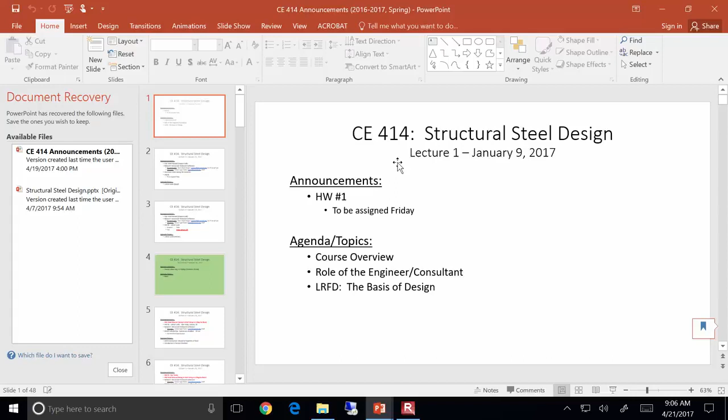All right, let's get started. We are near the end here. All right, two more lectures, including this one. We have this lecture, we have Monday, and then we have Wednesday off, Friday's exam review day.

What's that? I told you all that. I said that if you looked at the syllabus, I had that as a makeup day, and since we haven't had any snow days, I was going to hold myself to that. Well, there is that. I know, so if there's a blizzard...

All right, let's see, 1, 2, 3, 4, 5, 6, 7. I wouldn't be surprised with the weather we've had. I've gotten used to it being warm. Now I'm going to walk outside.

Okay, so let's be clear on the agenda. You all are turning in homework 8. I have given you homework 9. It is due next Friday. So we have one more homework here and one more in concrete, both due Friday. That's why I was saying don't put the concrete homework off to the last minute because of this one. Well, I mean, we got other homework to do next week.

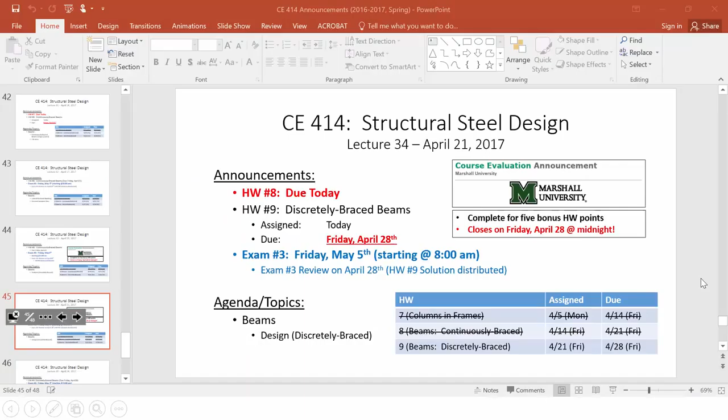In the meantime, I want to get into our final topic of the semester, which is designing discretely braced beams, okay? Now, just a heads up, I did re-record the lecture from last time. It was a mess. We didn't have the examples worked out, so I went and re-recorded it. What's that? Well, thank you.

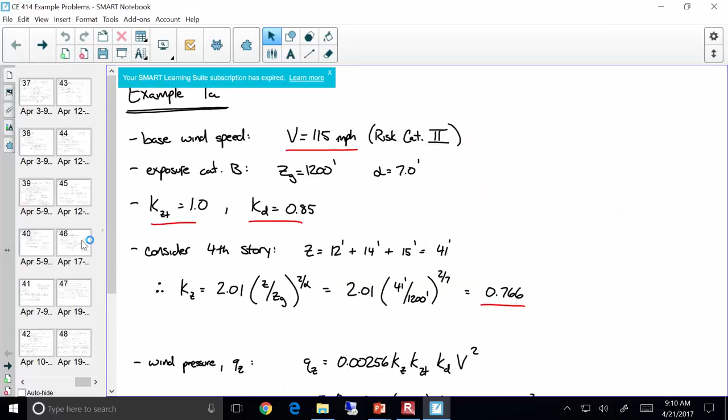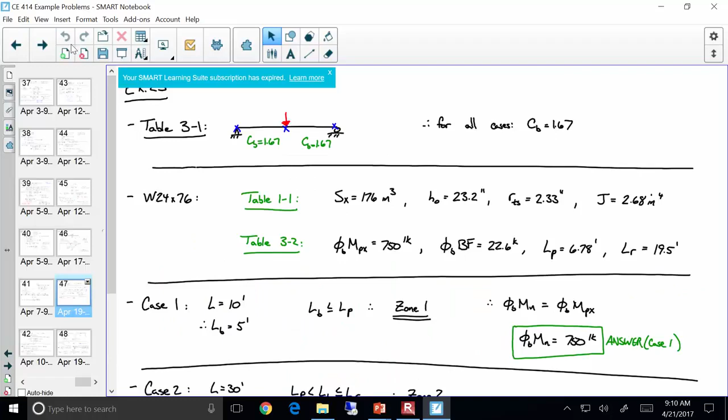Okay, one thing I'll point out, so on this example, I wrote out the answers, the 1.67, the 2.05, and the 2.33. I also went and did example 23. As you can see, I've got that done in the notebook. The main reason for doing that is that during exam review, if you all have questions about it, I can pull it up. So that way we have that.

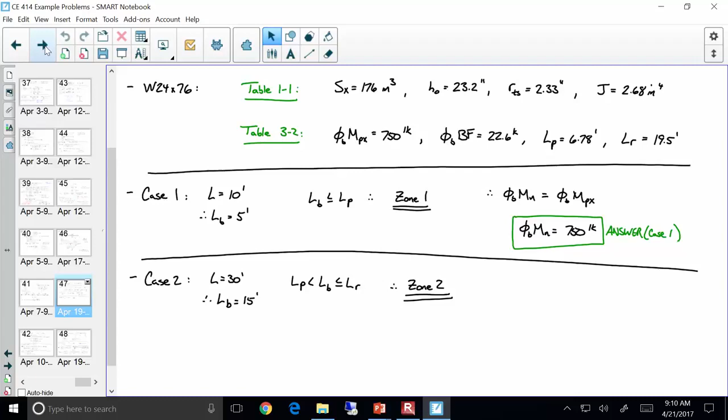But before we get into discretely braced beam design, I really want to make sure that discretely braced beam analysis made sense. Did anybody have any questions on discretely braced analysis? Yes? Okay, that's a good question. And that's really important for our discussion today.

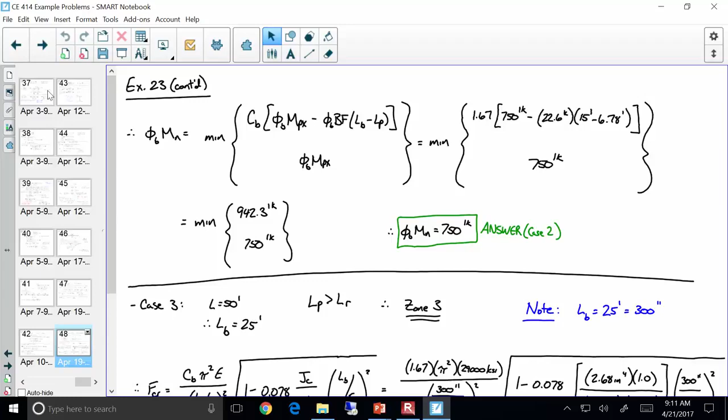The zones depend upon where your unbraced length is. So your zones are divvied up based on the two anchor points, L sub P and L sub R. So for case 1, in that example we did, we had an L sub B of 5 feet, right? That was less than LP, right? So that put us in zone 1, okay? And for case 2, we were between LP and LR, so that put us in zone 2. With me so far? All right, anything else?

That's the difference, yes, that's the difference. Any other questions? This is good stuff.

In order to design a discretely braced beam, you need to understand the LTB curve, the idea that there's 3 regions split between LP and LR. You have zone 1 that's fully plastic, zone 2 that's inelastic buckling, and zone 3 that's elastic buckling. You also need to understand that CB can serve to amplify your capacity. However, I don't care what CB does to your capacity, you're cut off at MP.

Now here's the problem with beam design. When we did columns, remember our column curve went down like that? We had an inelastic curve and an elastic curve. Barring material properties, to draw the column curve you only needed one property, and that was slenderness. I gave you a steel and said just plot the curve, and that was it. That column curve was the same curve for every single column, the W10 by 49 and the W14 by 800, and everywhere in between. The problem with beams is that's not the case.

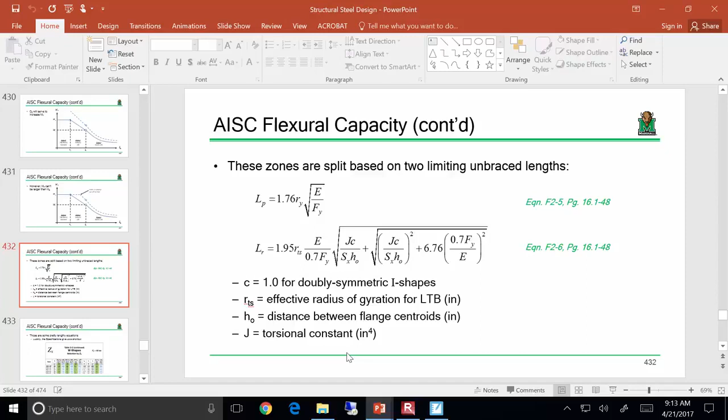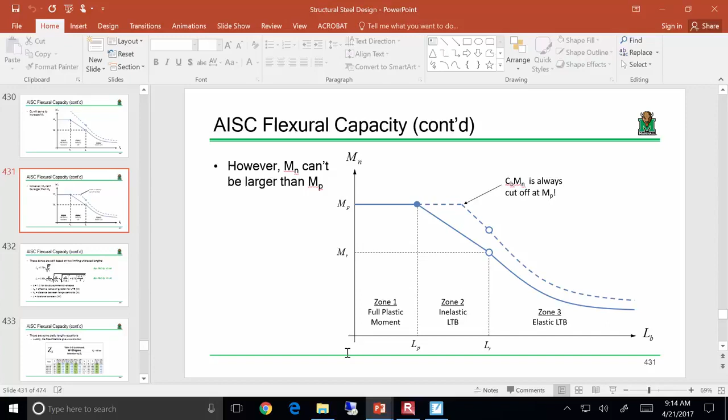Unfortunately for beams, there is not one single LTB curve that works for all of them. If I wanted to plot the LTB curve for one beam and then look at another beam, I'd have to plot an entirely different curve. Each curve is unique. They're all shaped the same, but all the individual values are different. Let's just take LP and LR - every single shape has a different LP and a different LR. That right off the bat dictates that every curve looks different.

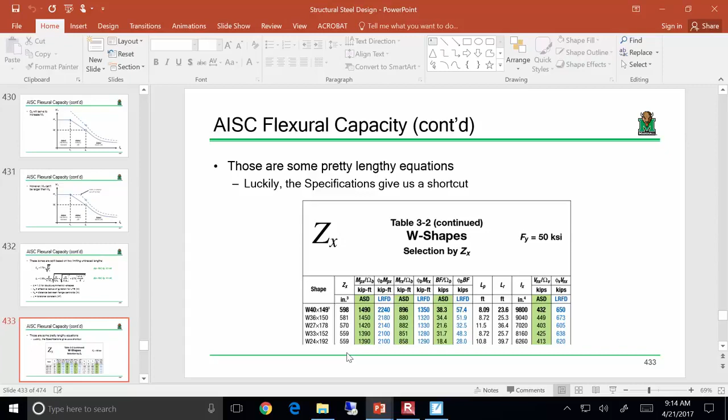Does that make sense? Does anybody have any questions about that - that every curve is going to be different, unlike with columns where it was the same curve for every column? Everybody okay with that? All right, let me put this in full screen.

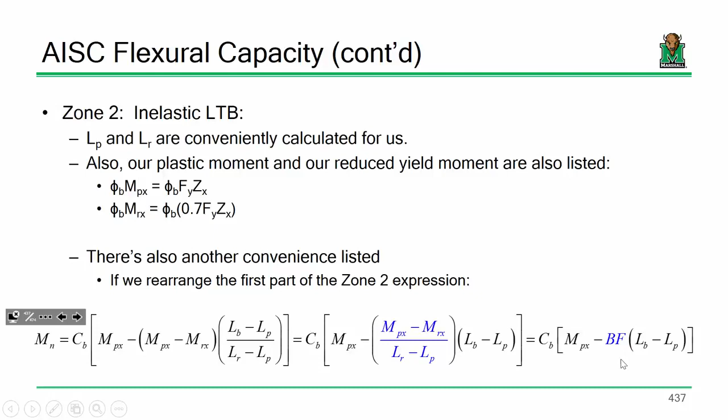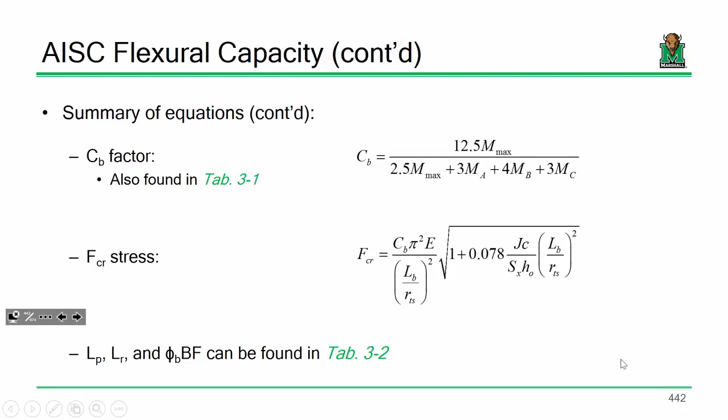If you understand that, then I'm about to show you a little bit of a mess and then simplify it a whole lot. We ended last time essentially summarizing our LTB expressions, zone 1, zone 2, and zone 3. These expressions are essentially plotting the curve, and we did an analysis example. To design a beam is difficult because each curve is unique.

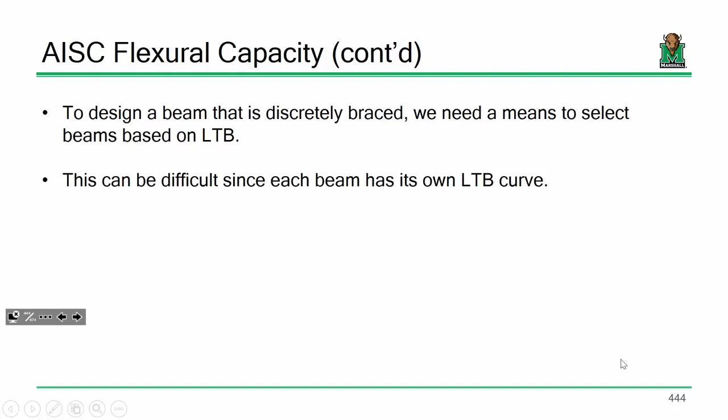So what the spec gives us is this. Now this is a tab-worthy guide - if you have your tabs with you, you definitely want to do this. I want everybody to turn to page 3-99, and there's probably 20 or 30 pages of this guide. Now, I know when you start turning through these pages, it starts to look like a mess.

You'll probably start to get to curves that look like this, and you'll just go, you have got to be kidding me. Really? Now, this looks like a mess, but really, all that is every single LTB curve for every single section, all plotted on top of one another. That's what that is.

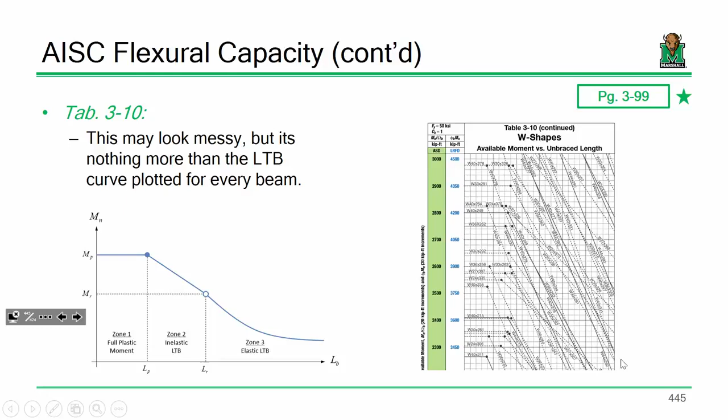There's no other way to select a section - that's the thing. Because each LTB curve is unique, there's no other way to go about it. However, the folks who wrote the manual were a little bit clever about some things.

Let me show you something. Have you noticed, thumbing through those shapes, that some of the lines are dashed and some aren't? What do you think those solid lines represent? No, it's not different zones. Just like the bold ones in the ZX tables - remember how in the ZX tables they were grouped, but the top row was bolded? Why was that top row bolded? It was the lightest within a given group, right? If you look, what you'll see is those solid lines are the lightest within a given chunk.

So for instance, I'm looking at this page and you can see there's a lot of stuff going on here, but I'll show you how this works. Now, I want everybody to look at the top left corner of the pages. What's FY?

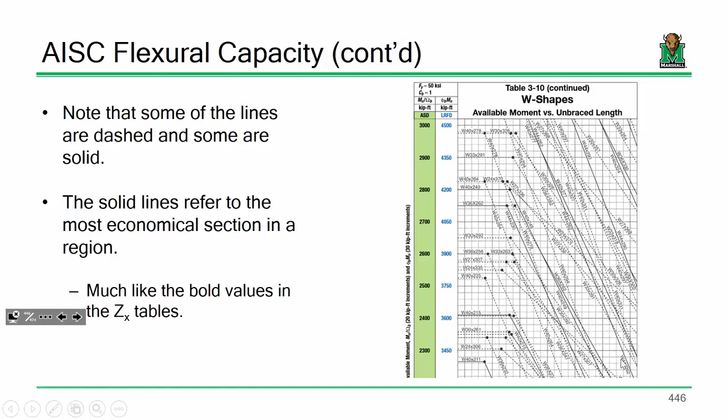50 KSI. So obviously, if you have a different grade of steel, you'd have to use a different guide. Well, what's C sub B? Every single one of these figures, every single one of these plots were plotted contingent upon the fact that C sub B equals 1. So here's what you do.

When we're in design mode, we're rarely dealing with the beam where C sub B equals 1. Usually C sub B does not equal 1. It's usually larger. So what we do is we enter the table. On the x-axis, we find our L sub B, our unbraced length. And on the y-axis, we find our moment. But our moment is not the factored moment, it's the factored moment divided by C sub B. We divide that C sub B out so that we're sort of dealing with a moment where C sub B equals 1. And the way that works is this.

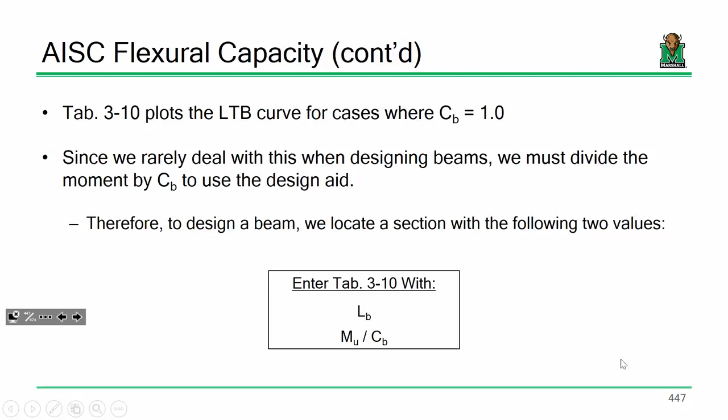Okay, so we enter that chart with those two values. Let's say we've got an MU over CB of something like 272.5, and we have an unbraced length of 20 feet. So this is what I did. I say, all right, let's find 20 foot on the x-axis. Let's find that value on the y-axis. Notice we're using the blue axis, not the green one, right? So find that, and that point's about right here. Everybody okay with that?

Now I propose that everything up here in this upper right region would be a safe section, okay? Because everything in the upper right, I mean, what is that indicating? Anything in the upper right would be a section that has a larger moment capacity and a larger unbraced length. Those are all conservative scenarios. So anything in that upper right portion is fine.

Which section do I pick? Do I pick the W21 by 68? I say no. I say you pick the W14 by 61 because that's the solid line. That is the lightest section within that given group, okay? Now, just so you know, the solid lines in this chart and the bold lines in the ZX tables may not necessarily match. But again, we're talking about different scenarios. We're talking about buckling as opposed to yielding, so it's a different scenario. Make sense? Everybody okay with that?

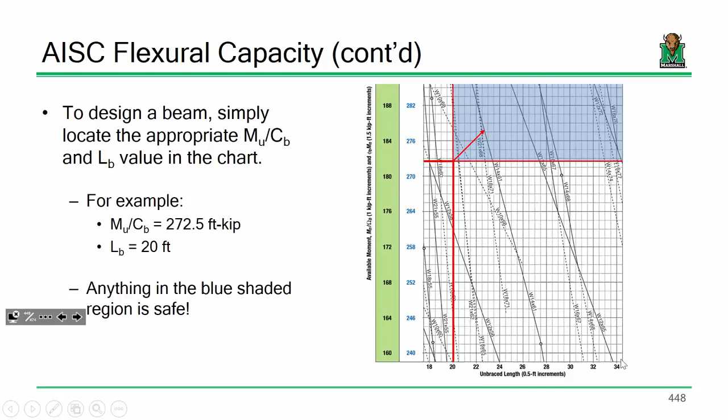Okay. Now, once we select a section, we have to go back and check it. There is no, I don't feel like, no, you have to check it. And here's the reason why. C sub B can serve to falsely give you a beam design. In other words, how can I put this? You know, what does C sub B do? It amplifies your capacity, right? It makes it larger. But it cannot be larger than M sub P.

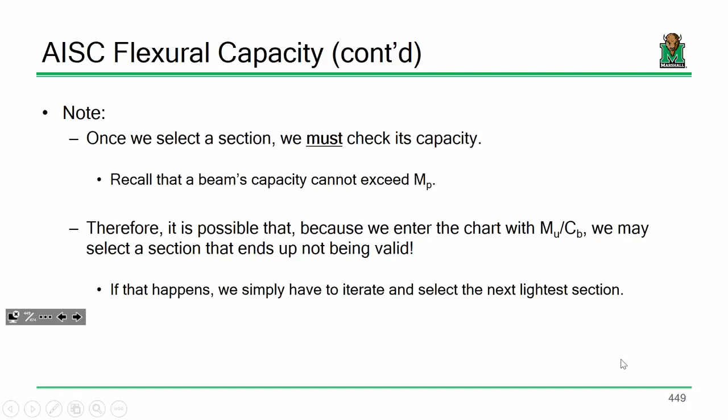Because of that, it's very possible in design that you can get, I guess the best way to call it, like almost a false positive, that you can select a section, it looks like it's good, but then when you go back and do the math, you find no, it's invalid, okay? And that'll make sense when we start getting into and digging into an example, okay? Everybody with me so far?

Okay, all right. Then let's take a look at this example. This example is a little involved, but we're going to do the example 4 times, okay? Because I want you to really understand beam design. And the only way I think that you can really understand it is to go through different scenarios.

So let's really try to digest what's going on here. Okay, so I want to select the lightest section. It's going to support a uniformly distributed service dead load of 600 pounds per foot. Now that includes the beam self-weight, so we're never going to have to go back and update dead loads with this problem. You would, if that statement wasn't there, with every beam that we pick, we'd have to go back and check to ensure that our estimate is fine. But for the purposes of this problem, we'll just say that 600 pounds per foot includes the self-weight.

Now this beam also has a concentrated live load of 40 kips at midspan, okay? So unfortunately with this problem, we have a substantial dead load and a substantial live load, so we're going to have to go through and compute C sub B. So this will give us a little practice on that.

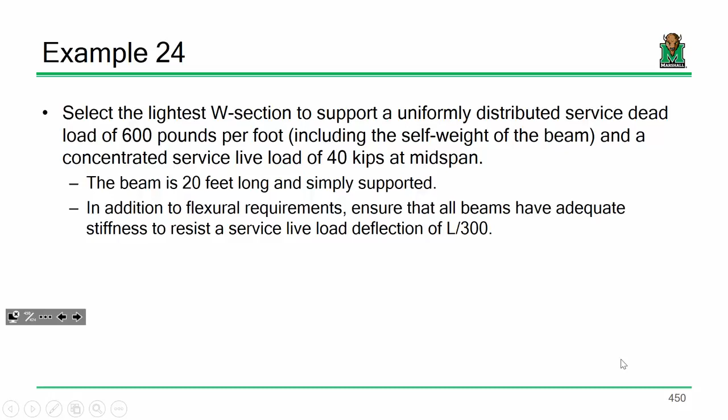Everybody okay with this? Now, the beam is 20 foot long. What is its unbrace length? Well, I didn't say that, okay? Let's look at the next slide.

We're going to design this example 4 times, looking at 4 different cases. Let's look at case 1. Case 1, we're going to take C sub B equals 1, and we're going to take LB equals 20. That is the worst case scenario. Does that make sense? Longest unbraced length, and we're not accounting for moment gradient.

From case 1 to case 2, we're going to say, let's actually go through and compute that C sub B value, and let's see how that affects the design. And you will see that it does affect the design.

Case 3, we're going to put a brace at midspan, right there at that point load. So that means L sub B is 10. We're still going to take C sub B equals 1 on case 3, and then case 4, we're going to go through and compute it. Everybody okay with this?

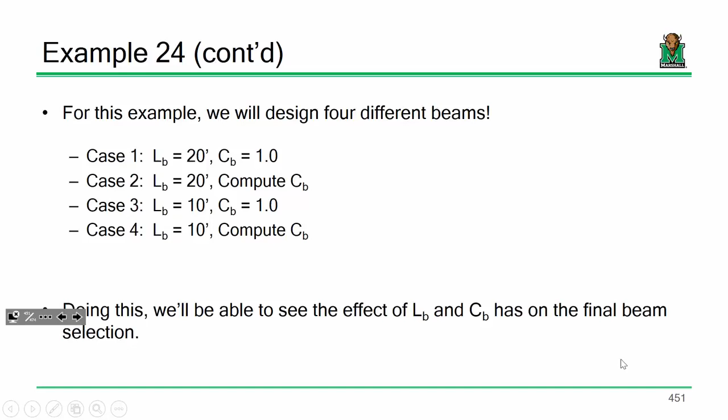The idea is I want you all to have a lot of practice with this table, and I want you to understand how L sub B and C sub B affects your design. Effectively, I would say this is about our last example for the semester. I'll show you all shear at the end, but it's not a big deal.

Excuse me. Save the best for last. Okay.

Okay, example 24. Let's look at the beam real quick, beam parameters. What's going on?

Okay, what was our dead load? Now, what would this be? 1.2 times that, so what is that? It's 6 and then 12, so 0.72. 12 times 6, 72. Did I do that right?

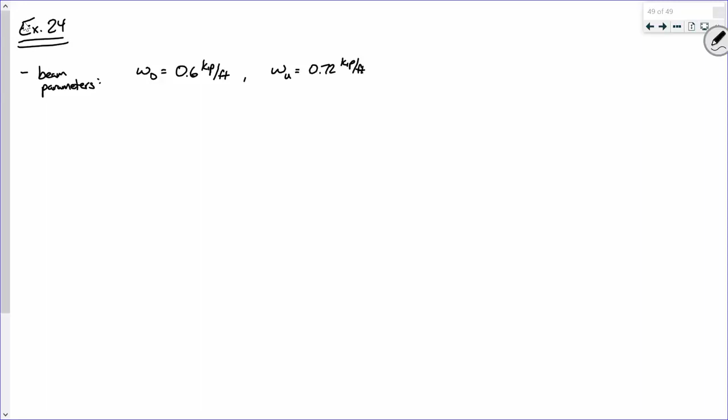All right, now we've got a live load of 40 kips. So what is our factored live load? There we go. 64.

On the homework or on the exams, this becomes a trend. If I see you all trying to take that point load and turn it into a distributed load, don't do that. You can't do that because you're going to get a different moment and a different deflection.

Everybody okay with this? We really need to make sure we're clear on that. Now, before we...

Go into moment requirements, I want to take a little bit and discuss serviceability requirements. I guess I should also put the span length is 20 foot, which is 240 inches.

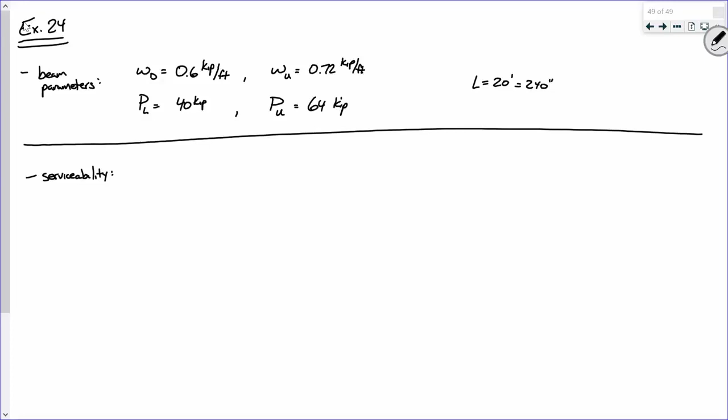Now, let's talk about serviceability. What is the maximum deflection allowed? Maximum live load deflection, I guess I should say. L over 300. And what is the actual live load deflection?

That means you got to go through your manual, go through the guides. By now, you shouldn't be complaining about having to turn to different pages in your manual. We're on lecture, what, 34?

Surprise, I can do anything I put my mind to. Say it again: PL cubed over 48 EI. Is everybody able to find that? By now, that's a pretty common one. Hopefully you kind of remember that one.

Now, what case was that? So all we really have to do, to keep this simple, is set these two equal to one another and solve for I. Technically it's an inequality, but we recognize that Ix is going to have to be bigger than whatever we solve for.

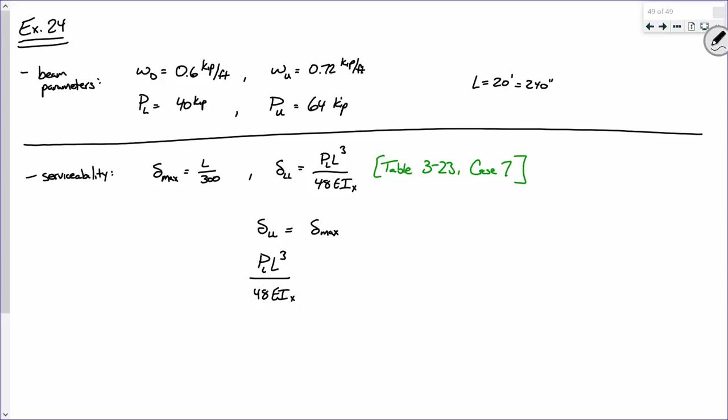So the live load, set that equal to the maximum, and solve, and I propose you're going to get an Ix minimum of PL squared over 48E.

Y'all see how I'm doing that? Flip and multiply that over, the L's cancel. Everybody okay with that? So 300 times...

What's the load? It's 40. What do you not do with deflections? Whoops, well, there goes the homework.

Oh no, my mind's made up. I didn't record that. I don't put the exam solutions on YouTube.

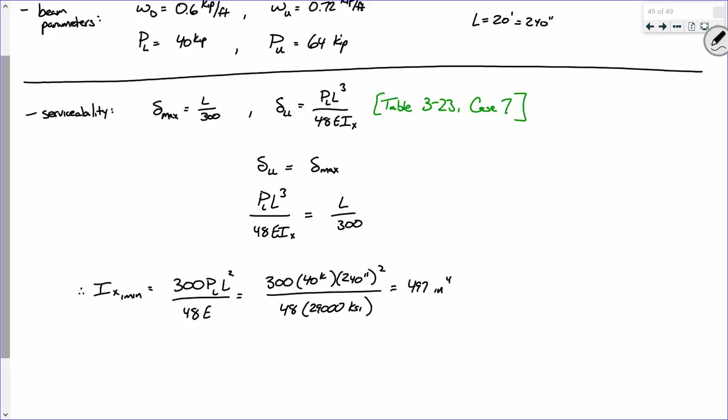That's an algebra thing. I said that one problem's going to have a lot of algebra. No, it's not. No, it's not. You're using a heavier section. That's not saving money.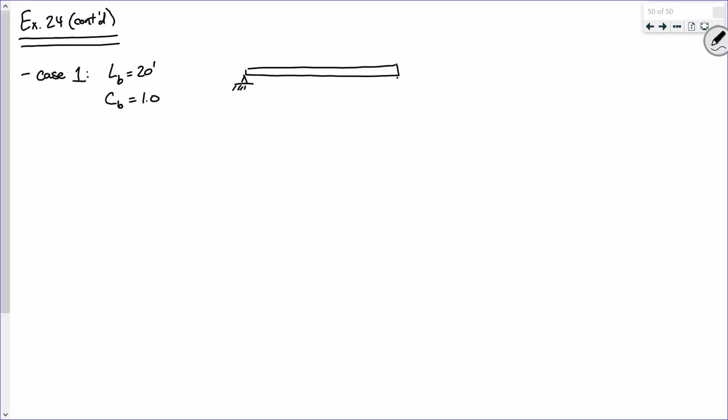What's the distributed load? Now this is a moment calc, not a deflection calc. There we go. And this, 64. Now that's 10 feet and that's 10 feet.

Now in terms of bracing, we only have bracing here and here, right? Okay. Because the beam is 20 foot long. It just so happens that its length and its unbraced length are the same. That's not always the case, but it just so happens to be in this scenario.

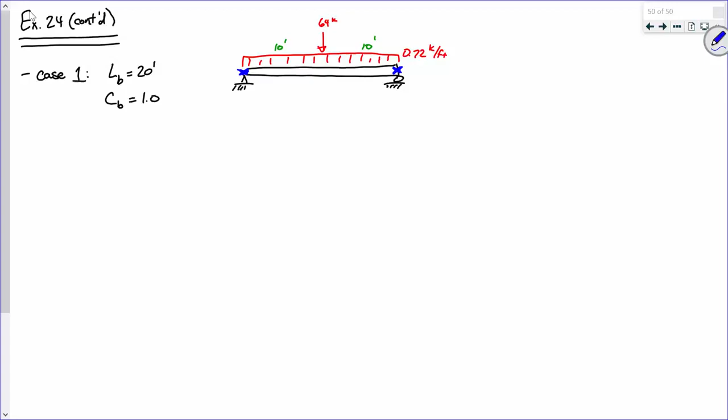Now, if this is our beam, how do we compute MU? Take it one load at a time. Distributed load. WL squared over 8. What about the point load?

All right, settle down. I need an answer on this one. 356. Do I have a second on that? All right.

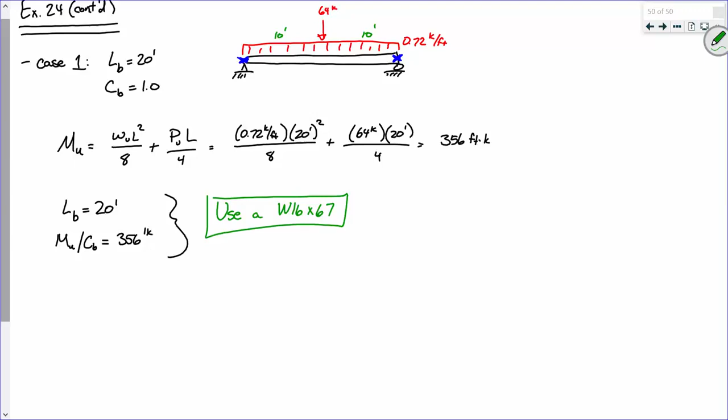Because what was the chart drawn off of? One, okay. It's incorporated, yeah, and the self-weight's incorporated.

Now, case 2, this is where we really got to pay attention, all right? LB is 20 feet, but C sub B does not equal 1. In other words, we have to compute it. So what's our formula for... you have a question? Yeah, in that case, does it mean we can't?

We are not able to use these tables anymore. These are all C sub B equal to 1. That's where I said we have to go back and check it. We're getting there, bear with me. C sub B does not equal 1, which means we have to compute it. Now, let's go back. How do we compute C sub B?

The 12.5 M max divided by 2.5 M max, etc., right? Now, I want everybody to look at this image up here, okay? I'm going to put a coordinate system on here so that we can all speak with the same reference. I'm looking up here at this beam on top, and I've got an X and Y axis, okay? So what do we have to determine? We have to determine MA, MB, MC, and MMax.

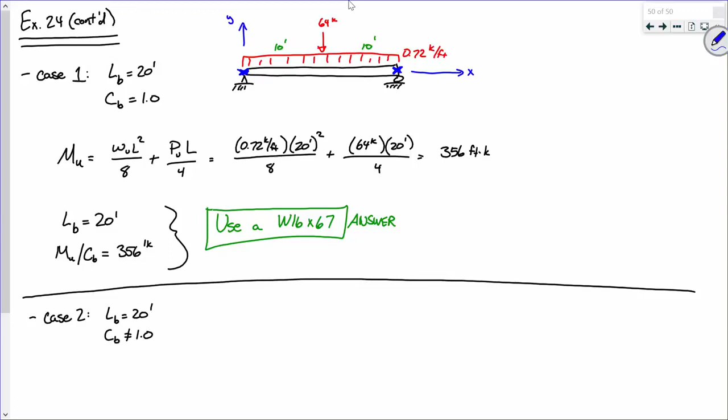So, first off, MB equals Mmax equals 356 foot kips. Is everybody okay with that? Now, how am I going to determine... well, okay, let me not skip ahead. MB and Mmax are equal. Everybody okay with that? Would you agree that MA and MC are going to be equal? They're going to be the same, right? How do I determine the moment right here?

Well, we could solve for reactions, cut sections, sum moments, or we could go to the spec. Go to table 3-23, everyone. Go to your shear and moment guide. Now, is everybody able to find this? I'll call it M sub W. Is everybody able to find that?

See what I'm talking about? Well, that's for the distributed load. Tell me, what is the function going to be? Yeah, for the point load. Say it again. Px over 2. Now you got that as case 1. This was case 7, is that right? Case 7? Okay, so watch this.

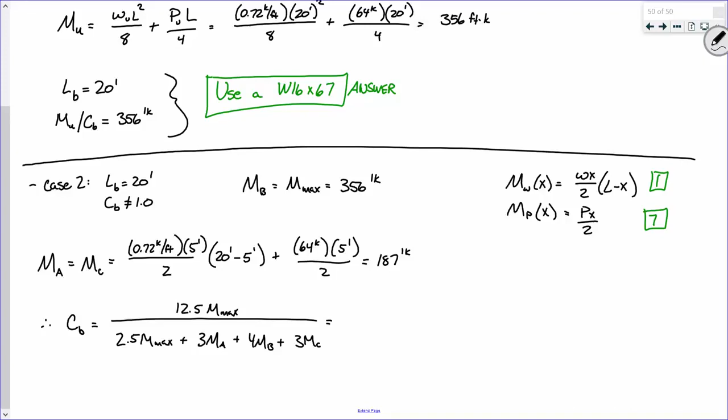All right, what do we have for a C sub B? Instead of plugging the values in, these two are 187, these two and that one are 356. Can somebody just plug them in? 1.295? Do I have a second on that?

You second that. Good. Everybody okay with this?

Mr. Cruikshanks, you made a point that we're not going to be able to use the guide. What I would say is we're not going to be able to use the guide directly. Let me explain. We'll be able to use it to pick a trial section, but we will have to go back and check it. This is what I'm going to do. So help me out.

What is MU over CB going to be? Now, when we do MU over CB, we're looking for the maximum moment within a segment, in which for this, it's MU for the whole thing. So MU over CB is 274.9 foot kips.

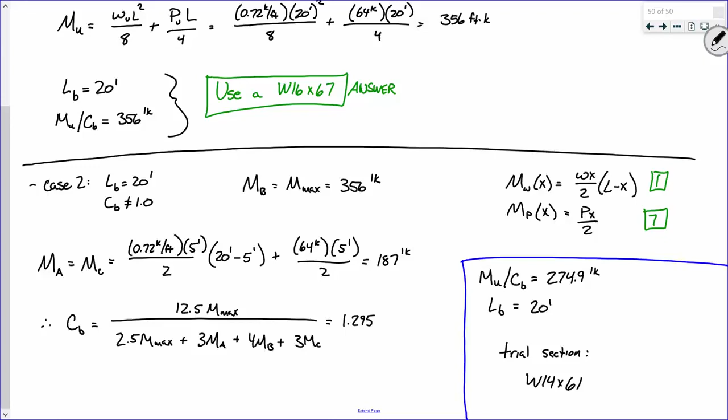Let me scroll back up here to case 1. What was our answer, a W16 by 67? What's the moment of inertia of a W16 by 67? I'll put that over here in red, so note. I just realized we completely forgot that. So what is IX?

You could find it in table 1-1 or table 3-2. It really doesn't matter. 954. What is that? Why did I care about that? To make sure it meets deflection requirements. Exactly right. So this one was good.

If it wasn't, we'd just have to use the IX tables to find a section. Does this make sense? Any questions on this?

Any questions? Now to check this section, you really just do what we did in the last example. Just pull your beam factor, your LP, your LR. You've got the C sub B value, so you just analyze it and determine phi mn. If that's greater than or equal to mu, you're good. We'll do that on Monday, but yes.

Anything else? Did I not? I thought I passed. Did I pass the sign-in sheet around? Yeah, for sure. See, now, if you were here at 9 o'clock. You weren't here at 9 o'clock. Actually, I was here earlier. That wasn't working, and then you left, so it, but no. I left to get the solutions for homework 8. I legit do have. Okay, real quick.